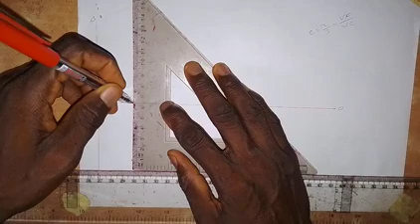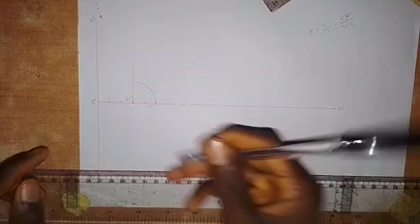The next thing is to erect a short vertical line at the vertex V, going up like this. Then we take the compass, put the pinpoint at V, and extend it to point F, the focus. Then we draw an arc like this to touch this vertical line. I'll call the point where the arc touches this vertical line point E.

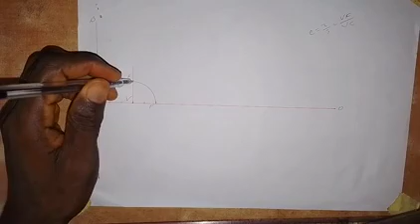The next thing I'm going to do is draw a line from point C on the directrix, passing through point E, and it goes in this direction. So from C, we draw a line, and it goes in this direction. Okay, so we have that.

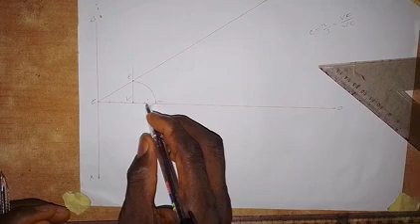Next, we number these points. I'll call this point 1, and this point 2. From V to 1 is 10 millimeters, and from 1 to 2 is 10 millimeters. We are going to have some points on the axis, and I'm going to make those points 15 millimeters apart, not 10. So this is 15 millimeters from 2.

So 15 millimeters from 2, then 15 millimeters from that point, again 15 millimeters, and another 15 millimeters. Let me just add one more; we may or may not need it, so I'll make this 15 millimeters. Let's stop it here for now. Okay, so the next thing we are going to do, we number these points.

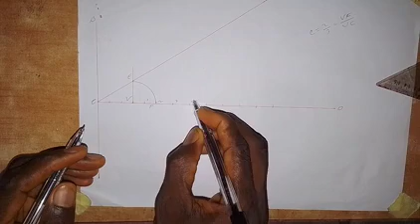So I'll call this point 3. So this is point 4, this is point 5, this is point 6, this is 7, this is 8, and then this is 9. Okay, so we have all these points.

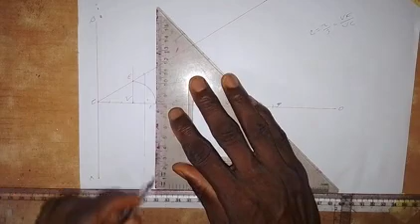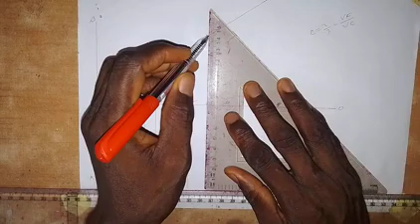So the next thing that I'm going to do is to erect a vertical line on each of these points. So we start from here. So erect a vertical line here on 1 and also on 2. On 3, we draw from here down, and then on 4, we draw from here down. On 5, we also draw a line like this. On 6, we draw.

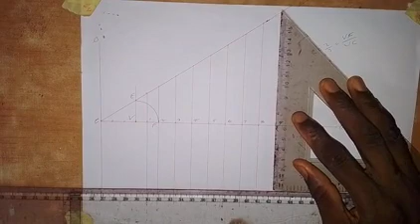On 7, we draw a line. Then on 8, we draw a line. Then on 9, I will extend this line a bit to this side. Then I'm going to draw a vertical line for 9. Okay, so here we take this down. Alright, so we have this.

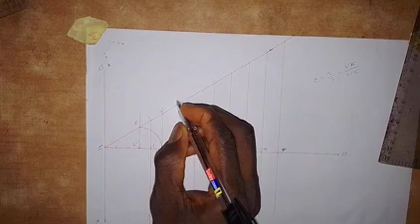So the points that we have on this line, I'm going to number them. This is point 1 prime, this is 2 prime, this is 3 prime, here we have 4 prime, this is 5, this is 6 prime, 7, then here we have 8, and then this is 9 prime. Alright, so we have this.

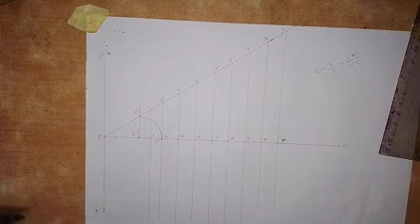So the next thing that we are going to do now is to locate the points that we are going to join together to have the curve, that is the ellipse, in place. So the first thing is to put the pinpoint here at point 1 and extend to 1 prime on this line, then we lift it up, put the pinpoint at F, that is the focus, and make an arc on line 1 up and down.

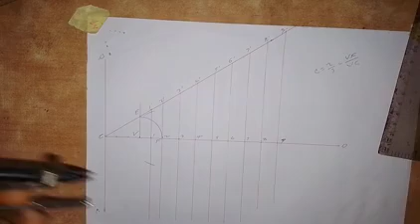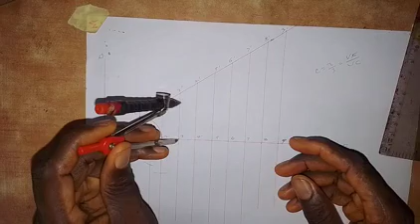Then we put it at 2, then we extend to 2 prime on this line. Okay, so we have this point, so take it down to make an arc on line 2. Then for 3, we put it at 3 here, then we extend to 3 prime on the line here, then we raise it up, put the pinpoint at F, and make an arc here and here on 3.

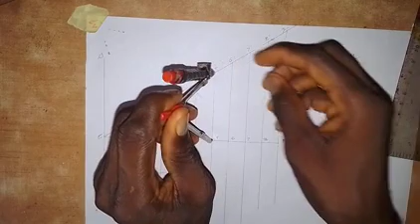Then we put it at 4 here. We extend it to 4 prime on this line, then we raise it up, put it at point F here, and make an arc on 4 up and down. Then we put it at 5 on the axis. We extend it to 5 prime, and then we raise it up, put it at F, and make an arc on line 5 up and down.

Then we put it at 6. We extend to 6 prime on the line. Then we raise it up, put it at F here, and make an arc on 6 up and down. Next, we have 7. We extend it to 7 prime on this line. So we have this point, we raise it up, put the pinpoint at F here, and make an arc on 7 up and down.

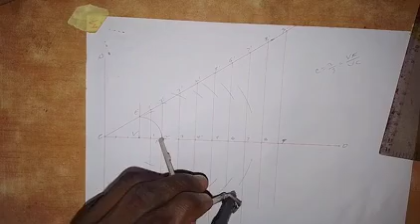So the last one is 8. We extend to 8 prime, so this is it. Then we raise it up, put it at F here, and make an arc on 8 here and here. Looking at what we have here, this will be the last point. If I'm to take for 9, it will be somewhere to touch this point, so we just leave it here like this.

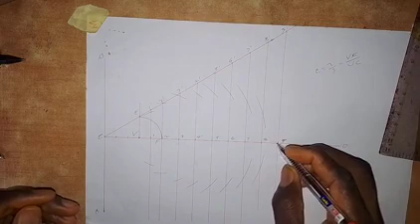So this point here now is the second vertex. Let me just take the distance. If I take from 9 to 9 prime on this line, we raise it up and put it at F here, you can see that it almost touches. So this point now is the second vertex, so we have V2 here, while this one is V1. Let's take note of that.

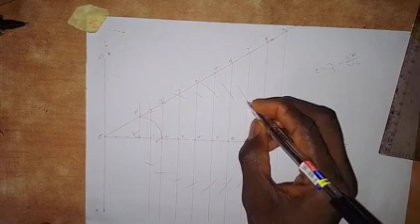All right, so now that we have located the points, let's bring out the points. So there's a point here, there's a point here, we have this point on this line, a point here, a point here, a point here, then point V here, that is V1. So we have a point here, we also have a point here, there's also a point here, and then we have another point.

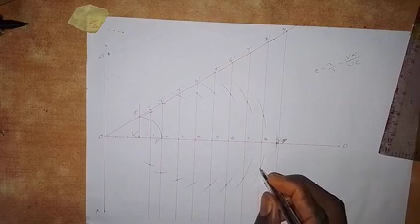So we are going to join them together with the use of a French curve for us to obtain the ellipse as we are given. So this is my French curve, so we have to adjust it for us to be able to join the points together. So this can go like this to this point. All right, so we have this.

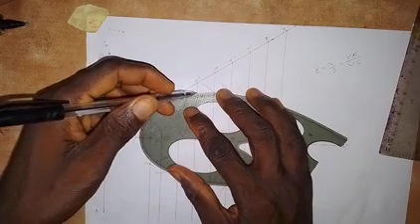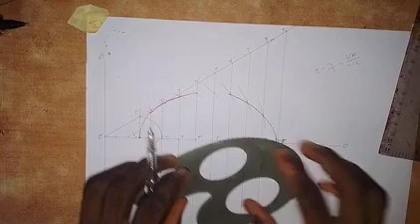And then, if I come to this side here, okay, we have to adjust it. Okay, so we join this point together. Okay, so we join to this point. All right, and then for this part, I'm going to adjust, and then join this point together. So we have that part drawn.

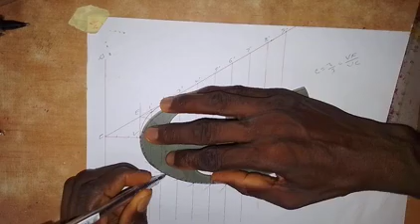So then we come down here, so we set like this. So you adjust the French curve, okay. All right, so I can go this way, okay, so it goes this way. All right, so we have that part drawn.

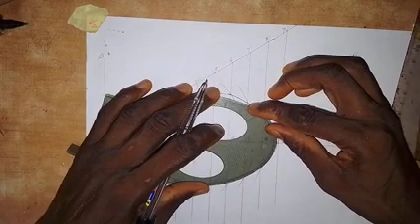So next, I will turn it to this side like this. Okay, so adjust it for us to see the point that we have to join together. Okay, so I can go this way. Alright, so then the last part is here. So I'm joining this point together. Okay. Alright, so we have formed the ellipse as you can see here.

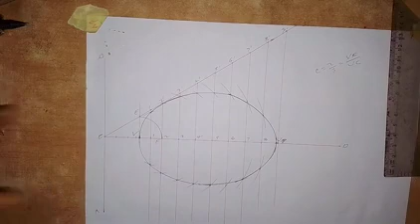Alright, so the next thing that we are going to do is to draw the tangent and the normal, as we are told that the point where we are going to put the tangent is 70 millimeters away from the directrix. So this is the directrix, as I said. So we are taking a measurement of 70 millimeters from the directrix, setting the ruler like this. Okay, I will take 70. So this is 70 millimeters at this point here.

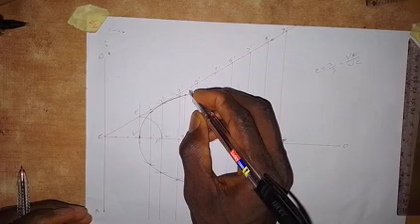So here I'm going to draw a vertical line from this point to touch the curve. So it touches the curve at this point. So this point now is the point where we are going to pull the tangent. I'm going to call it point P. So this is point P. So now the next thing that we are going to do is join PF together like this. So join PF.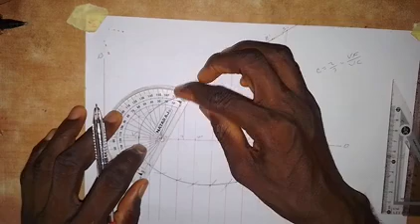Okay, so then the next thing that we are going to do is that we take our protractor and we set the midpoint of the protractor on point F, while this line on the protractor should be on line PF. So we set like this. Then along this line that goes to 90, we put a dot on the paper like this.

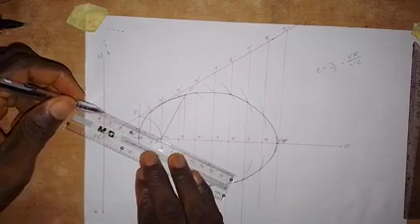Alright, so then we have to draw a line from F passing through the point that we just put on the paper, so it goes like this to touch the directrix. Okay, so now where this line touches the directrix, F cannot work there, so I'll call it point G. I already have F as the focus, so that is point G.

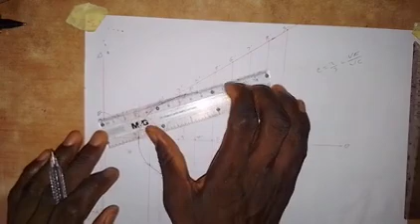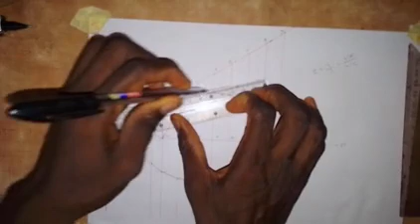So I'm going to draw a line that will join PG together, and that line will be a tangent. So we just set like this at G and P, then we draw the line like this. Okay, so make it a thick line. I will call this end of the line H. So line GH is the tangent to point P on the ellipse.

Then for the normal that we're asked to draw, a normal is a line that's at angle 90 degrees to the tangent. So we have to set our protractor, so the midpoint should be on point P, and then this line on the protractor should be on GH. So we set like this, and we put a dot on the paper like this. So here we have this point.

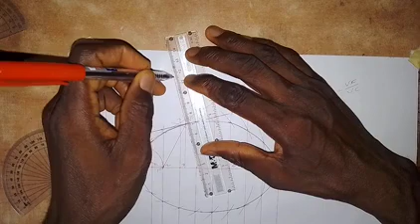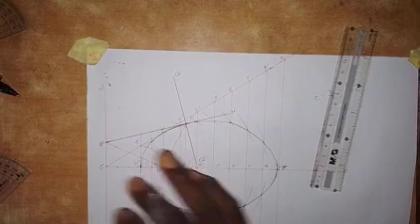So what I'm going to do now is to draw a line from P, passing through the point, and it goes like this. Okay, I'll make it a thick line from here to here. I'm going to call this Q, and then I'll call this Q prime. Okay, so this line QQ prime is the normal, while GH is the tangent. So this is how to solve this question as you have seen it here.